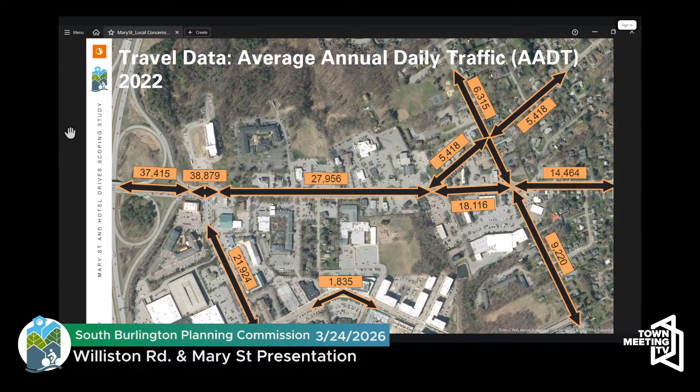Something to note about the volume shown for Market Street: those were recorded back in 2022 when there were less than 2,000 vehicles shown, 1,800 vehicles. Since then, there has been substantial development, so we would expect current volumes to be quite a bit higher. But this just gives us overall context of some of the traffic in the area.

Here we summarize crash data specifically at the two existing intersections, one at the signalized hotel drives and the other at the stop-controlled intersection of Mary Street and Williston Road. These data are for the 5-year period of 2020 to 2024. There were 29 total crashes during that period at the hotel drives and almost half as many, 16, at Mary Street.

The crash patterns at the hotel drives were namely angle crashes, angle and broadside, as well as rear end and side swipe, which are common among congested areas like this at an intersection with such high volumes and a 4-lane arterial. At Mary Street, the overarching pattern was angle crashes, and that's also not surprising, seeing it is a stop-controlled intersection at a 4-lane arterial with such high volumes.

Fortunately, no fatalities were recorded during this time period at these two intersections. There were 4 injuries recorded overall, 3 at the hotel drives and 1 at Mary Street. No crashes involving pedestrians or bicycles were recorded. At Mary Street, there was 1 crash involving a heavy truck and 1 involving a motorcycle.

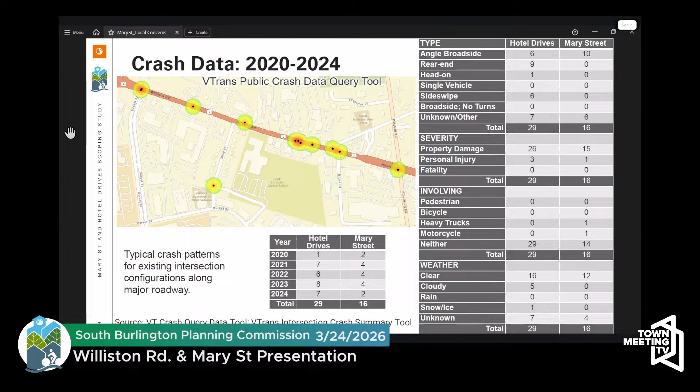Is there any data on how many of those were people trying to cross the center line to make left turns? Because it just seems like, I don't know who dares try to make a left turn onto Williston Road.

That's a great question. In order to get that specific in the data, we would have to request from the state the report narratives and then go through them to look for more details. We did not do that. However, you make a great point, and that's exactly the assumption we would make - with that pattern of angle crashes at this specific intersection, it is likely that a number of those are related to making a left turn either from Mary Street onto Williston Road or from Williston Road onto Mary Street.

Yeah, I'm looking at the ones that are closest to the central school out on Williston Road in front of that. Isn't there like fast food restaurants right there?

Yep, we did not analyze those crashes. We just looked at right at the 2 intersections. But we have heard anecdotally that over the years there have been not only a number of crashes, but even vehicles that have crashed into some of the buildings and businesses along Williston Road in this area.

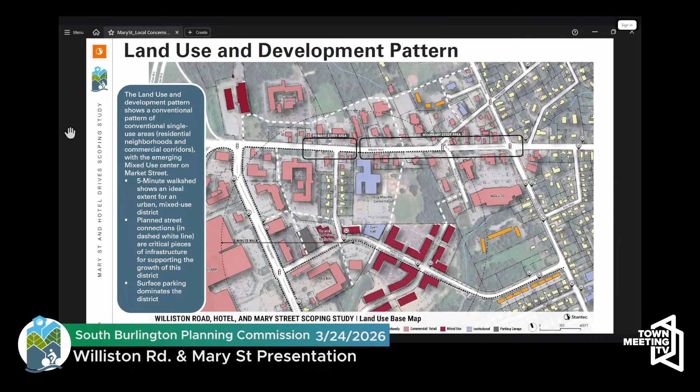Here we look at walkability related to transit stops. Each of the transit stops shown has an approximated 3-minute walk time radius around it. From that, we see that there are some gaps along Williston Road compared with other street segments in the area, and possibly some opportunities there.

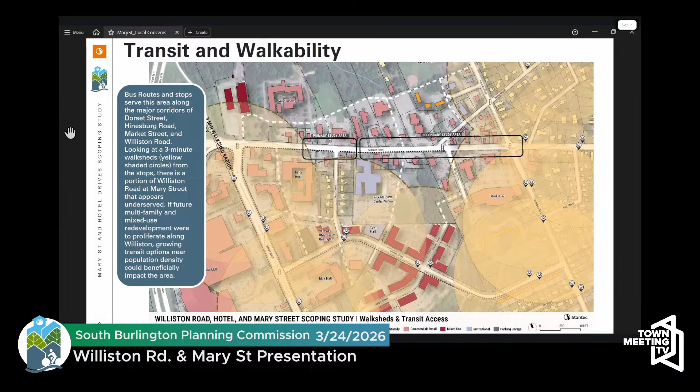Here we look at the frontage of buildings. For buildings that have a solid red line across it, that represents a more continuous facade with several access points, for example what's shown along Market Street. The red dots are individual entrances, and we can see those are more common along some of the development along Williston Road. Those types of patterns of land use development tend to correlate more with automobile trips to get to and among the different land uses and businesses, compared to having more continuous facades.

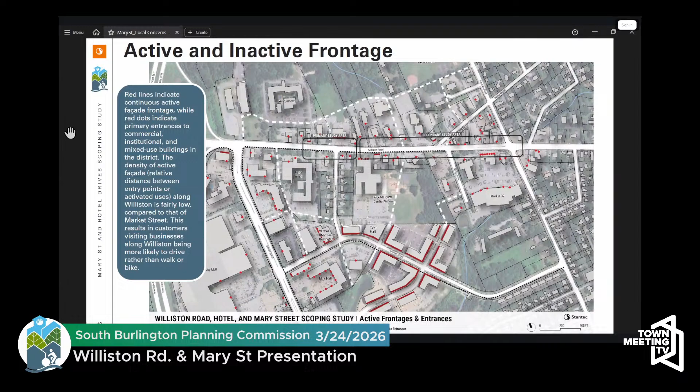Here we look at building setbacks. The light orange shows how far from the roadway different buildings are. We can see some of the newer development along Market Street are quite close, compared to development along Dorset Street and Williston Road, where the buildings are set back quite a bit further from the road.

Generally with surface parking lots between the buildings and the roadway, and those parking lots generally don't have designated routes for pedestrians. So again that lends itself more to automobile trips versus being able to or willing to park once and visit several establishments, or just walk there from the start.

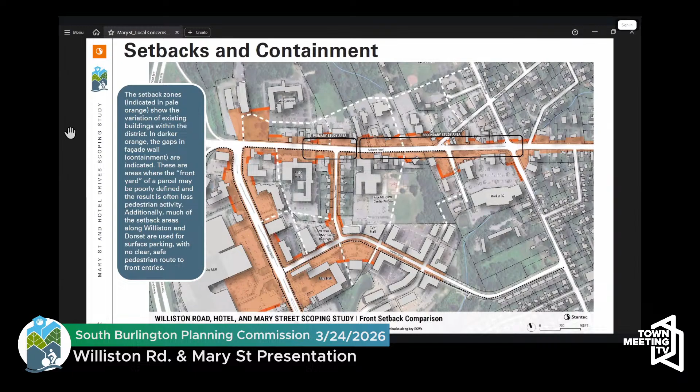And here we show general age of development in the area. So the darker building footprints represent newer development, while the lighter colors represent older development. This might help us understand what are likely to be some of the properties to be redeveloped in the next 5 to 10 years, thinking about it in the context of expecting some substantial growth or development along Williston Road over the next decade or more.

Are you taking questions? We can. We'll, sure. Yeah, I wonder if we should finish the slides first, if that's... Yeah, we will have a time to open up. Do you have just a clarifying question about what you're seeing? Okay.

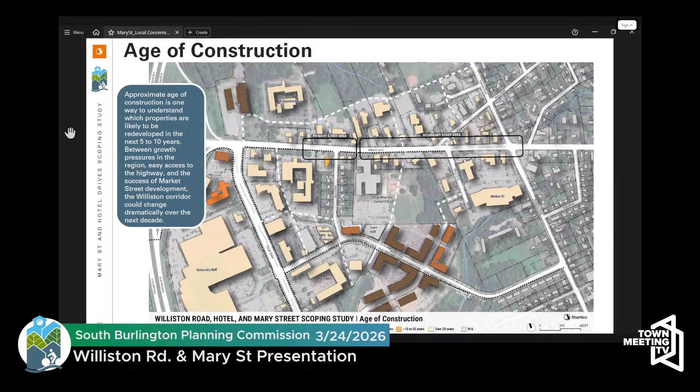Yeah, so it's actually a good point, I meant to bring this up too. The version that's in our packet, you can't see the legend. So maybe before it gets posted somewhere, you might want to reprint it so you can get the legend included. Thank you, I noticed that this afternoon, and so this is actually a modified version, and I'll make sure that Erica has a copy of it so that it can be updated for the site. Thank you, Ryan. Yeah.

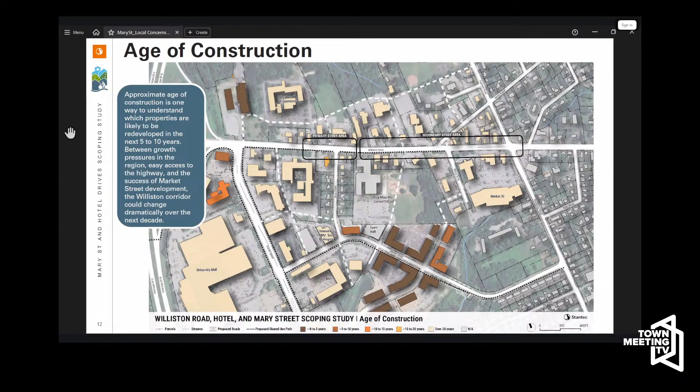So looking at some of the existing conditions, as was mentioned, it is popular currently for motorists to travel between Williston Road and Market Street by way of the existing signalized intersection at the hotel drives, and following that parking lot access way southerly down towards the Department of Motor Vehicle Complex and through their parking lots and access ways.

Also shown is the location of the current temporary barrier at the southerly end of Mary Street, made up of concrete barriers, which the city is currently planning to remove in order to open up Mary Street from Williston Road to Market Street at the same time, or once Garden Street is connected to Midas Drive.

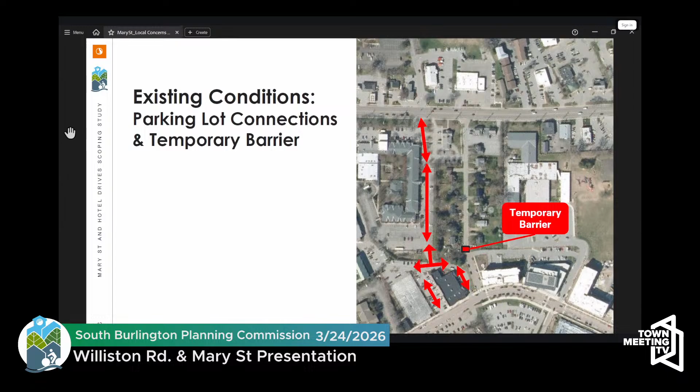Here we see a common use of the Hotel Drive's signal in order to access Mary Street and prevent having to deal with a stop-controlled intersection at that 4-lane arterial. So, particularly if you're making a left onto Mary Street or a left onto Williston Road, it's common to use the bank parking lot as a route from Mary Street to the approaches of the signalized Hotel Drive intersection.

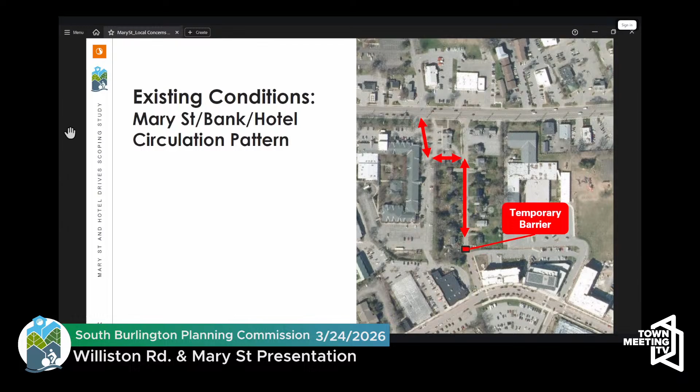Another observation that we made on site in the mid-morning was that for the crosswalk, there's one crosswalk over Williston Road at this location on the easterly side of the intersection. It does turn on every cycle. It is exclusive, meaning that no vehicles are receiving a green light during the pedestrian phase. So that's an opportunity to make some adjustments.

Sean, I should have caught this on the slide. I did not. There's currently a software issue with our ped buttons, and so it's picking up people driving by as a pedestrian call. It is something we have dealt with before, so that one will get fixed so that it will be only when someone pushes it. But it is, yeah, I should have caught that sooner. I missed that one. No problem. Thanks for the update. Yeah.

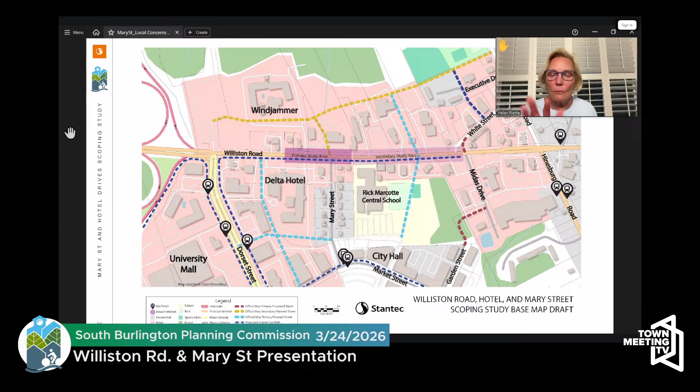Yes, so to piggyback on Colin's thinking ahead, when I look at the map and understand the secondary, kind of mustard colored potential roadway in front of the Windjammer, we've been talking about that for a very long time. I notice that same colored line kind of lines up with Mary Street. I think there's a lot of good reasons to consider in the future that road, just to access some infill and move traffic and people. But I also think it makes sense lining up with Mary Street, and maybe it gives that signalization an extra boost, in terms of long-term, rather than doing it somewhere else and then in 20 years we move it.

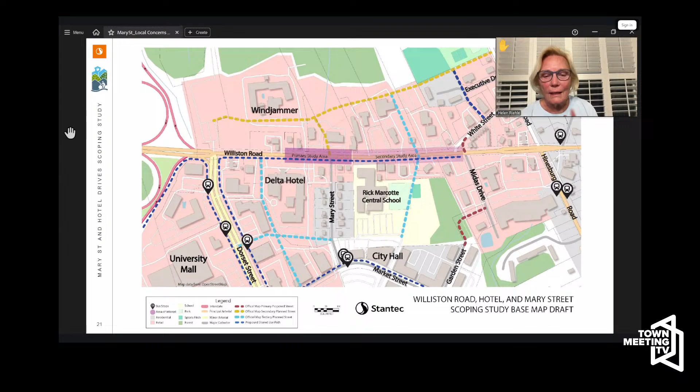I also wonder if with that back road, if that's the kind of transportation development that would reduce the number of curb cuts along Williston Road and cut down on some of that traffic as well. So it's just a thought. I know we're not here to say we should put in that secondary road, but I think it has some relevance to the discussion long-term.

Thank you, I appreciate that. We are definitely looking to receive any ideas from the public or the commission at this time. I'll make two minor comments in terms of that mustard yellow road showing aligned with Mary Street. That particular alignment might be challenging based on recent discussions with the landowner of the building showing it going through on the north side of Williston Road, but something within that area that comes down to Williston Road could be a possibility. Having a road behind some of those properties would allow movement among them without having to access Williston Road, whether in a motor vehicle or otherwise.

Donna? Yeah, this team from Stantec has heard this before, but I thought I'd bring it up so the folks on the commission get a different perspective about the walkability and pedestrian friendliness of streets. We've tried hard to make Market Street more pedestrianized, but it's still largely a road that's hard to control traffic speed on. There's an opportunity, I think, that Mary Street could be that more pedestrianized space, where cars aren't quite as welcome. They can be there, but it's much more pedestrian friendly.

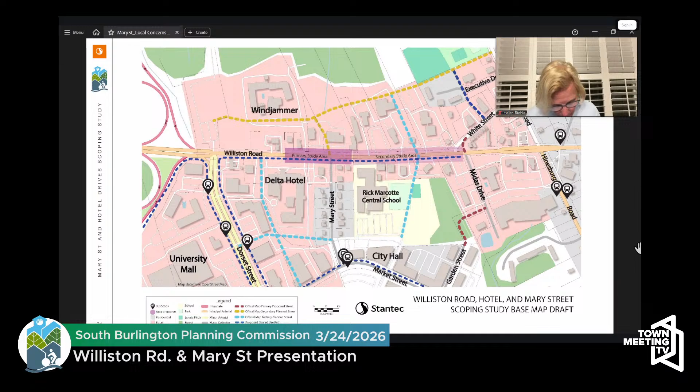You in the red coat, and then in the purple shirt after. Hey, I'm Jess Weichel, I also live on Mary Street.

I just wanted to really advocate for not moving the signal to the end of Mary Street. We've been referring to the roadway through the hotel parking lot as a cut-through this whole time, and I walk around this neighborhood every day, it is a cut-through. People are trying to get as fast as they can between Williston Road and Dorset Street because they're in a hurry, not trying to access houses on Mary Street or Market Street.

And they drive quickly. Just tonight, on my walk home from work, I saw two people get in a shouting match because they were both trying to drive through that area too fast. Even if Mary Street is inevitably opening up, I don't think redirecting a lot more traffic down it is a good thing. This is the only residential neighborhood in this whole study area we're looking at. I would really just voice strongly that I don't think we should send more traffic that way. Thanks.

I just wanted to mention one thing about where Mary Street would intersect Market Street. The senior housing right on that corner - because I park behind City Hall and go out that way - you have to be so careful pulling out onto Market Street there, because there are pedestrians crossing all the time. It is a dangerous spot for pedestrians right now. I wouldn't want to see what happens, especially because you're just coming around a curve there, and that curve adds some real danger. You have a crosswalk there, but it's not very visible because of the curve.

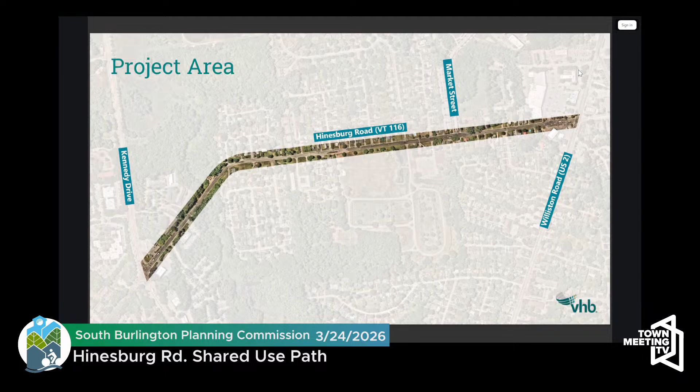So quick overview of the project area. We are looking at Hinesburg Road, also known as Vermont State Route 116, from Williston Road south to Kennedy Drive. Just a quick recap, if this project sounds familiar to those on the commission and in the audience, it's because it was studied several years ago as part of the South Burlington Pedestrian Bicycle Feasibility Study Volume 2. This section of Hinesburg Road was looked at alongside a couple other corridors throughout the city, and that feasibility study landed on a preferred alternative of a 10-foot wide shared use path along the west side of the road.

So as was being discussed, there's a couple other ongoing efforts too in the area, which we thought we'd draw attention to, given quite a bit of energy happening around City Center, Market Street, the Market Street signal, which should be Hinesburg Road, Market Street signal.

This was discussed via public comment on the previous study, and obviously the Garden Street Williston Road intersection and general Garden Street connection study is nearby with this, but really looking at what was previously done for public engagement and the determination of a preferred alternative. The intent of a meeting like this, being a public informational meeting, is not to relitigate the alternative that has been selected, that is firm. This is really to look at the conceptual design and the impacts and considerations of that.

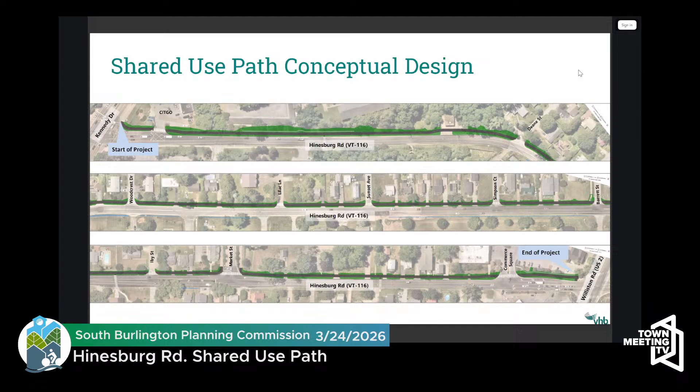So at a high level, these are kind of a stacked roll plan of the intended design. I'm going to zoom in on a couple areas, one per each of these layouts, and you'll see what the level of potential impact is. The intent here is to show you, all right, there was a list of those project considerations. Now when we zoom in on those, here's what those are actually looking like in practice.

So for example, this is just north of the Citgo station, where we are right adjacent to those steep slopes. We have utilities in that area. Given the proximity to Hinesburg Road and the need to be at least 6 feet, or the recommendation to be at least 6 feet from the travel lane, which means 6 feet from that white stripe, we can't really shift or widen the existing sidewalk toward the road. We need to go away from it.

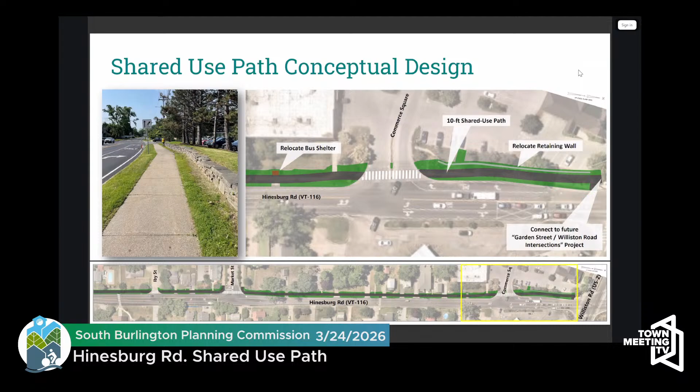So where we go from here, as I touched on earlier, we just submitted our NEPA categorical exclusion to the state. We're anticipating about a 6 to 9 month review there. Upon receipt of those comments, we will move into preliminary design.

At that point, we'll know what we need to know from our archaeological resources investigation, and about that right turn lane at the Commerce Square Plaza. We'll hopefully have a much more refined design that we can submit back to the state as preliminary.

Once that is approved, that gives us a pretty good idea of the overall footprint of the project, and that's when we're comfortable moving into the right-of-way phase, having conversations with adjacent property owners about potential impacts and either mitigating or minimizing those. Once we have right-of-way clearance, that's when we advance into final design and eventually bidding and constructing the project.

So with that, I realize that was pretty rapid fire. I'd be happy to answer any questions from the commission and or from those in attendance here today.

One quick comment. I noticed that in the original alternative analysis, there was discussion over adding a crosswalk at Right Court, whatever the full name is.

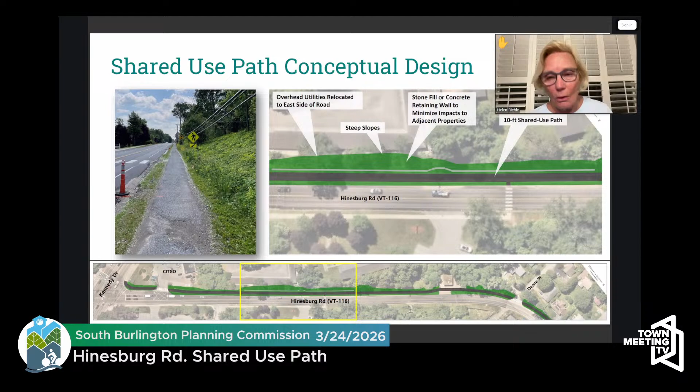Thanks, Helen. I'm really glad we're working on this sidewalk because during COVID I walked on it all the time and it was horrible.